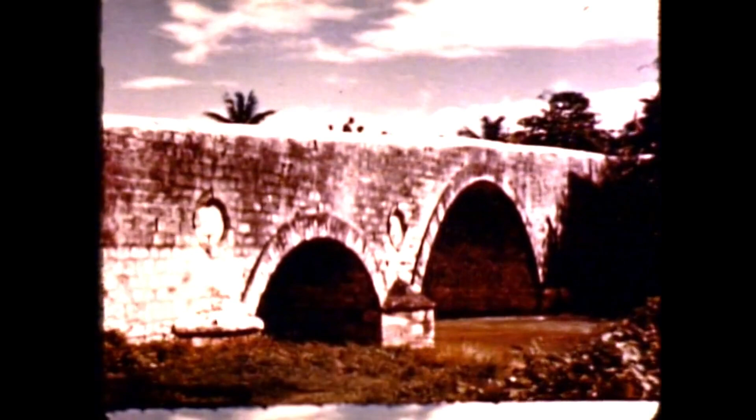Throughout human history, bridges have been milestones of progress, measurements of man's increasing ability to overcome the obstacles that once restricted his development. Today, a nation's progress depends to a large extent on an efficient and effective transportation network linked together by bridges designed to span every type of natural barrier.

Modern wheels, born to serve in a great transportation system, race over the once impassable barriers and speed on to the next triumph of the bridge builder's art. The development of our country owes much to the advance in the science of bridge building, which hastened the growth of our cities and of large sections of the country.

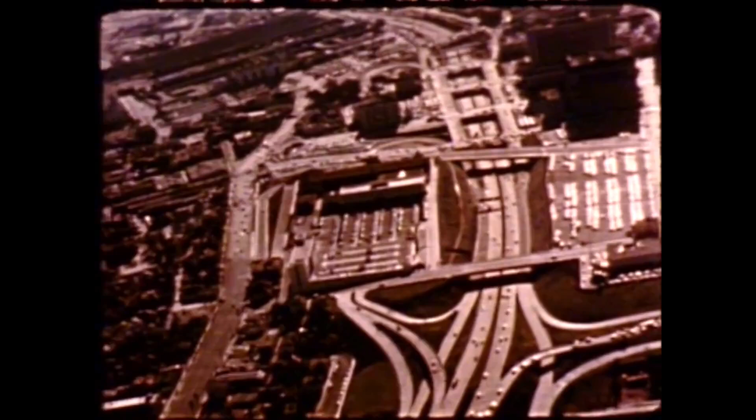Linking the country are tens of thousands of railroad bridges and hundreds of thousands of highway bridges, the world's finest transportation system, spanning gullies, ravines, and valleys, streams, rivers, and harbors, tying each solid land area to its neighbor, literally weaving America into a closely knit fabric with tough strands of steel.

Here, where the Monongahela and Allegheny rivers meet to flow westward as the Ohio, was the Pittsburgh of the future, the city which George Washington considered the gateway to the West. Pittsburgh is today the city of bridges and the home of the largest and best-known builders of bridges, the American Bridge Division of United States Steel.

In the shadow of the home of these bridge builders are many examples of their engineering skills. A showroom of bridges. All are vital links in Pittsburgh's transportation system and the country's transportation system. Structures based on a mastery of mathematics and physics and chemistry and geology and aerodynamics and other exact sciences.

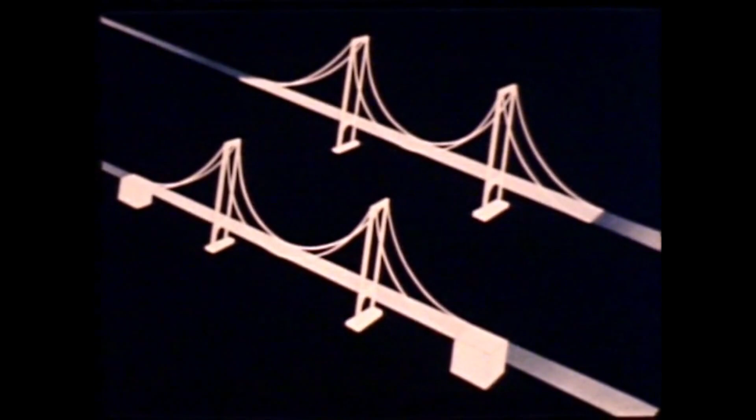The suspension bridge has been called the bridge of the future, since it is capable of meeting the demands for spanning greater and greater distances. Suspension bridges have personalities of their own, even though they may look alike to the casual observer. For example, these two bridges appear to be of the same construction. A closer look, however, shows that one is the conventional type with two tower piers and two anchorages, while the other is the self-anchored type with two tower piers, but with the roadway itself serving as the anchorage.

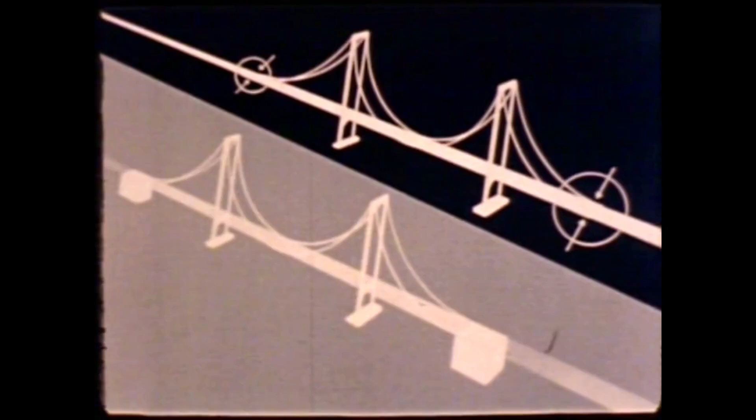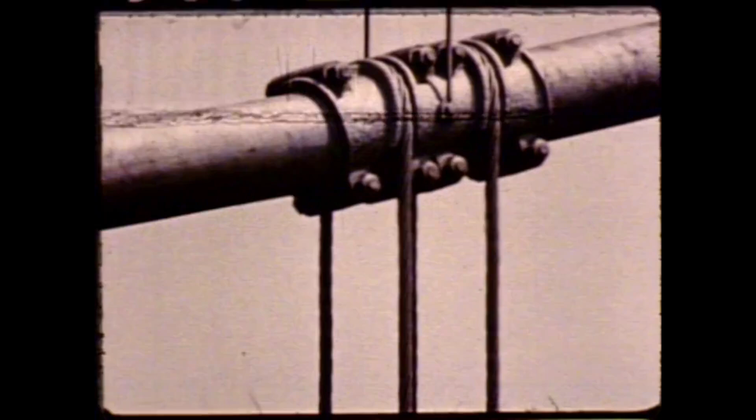Crossing the Monongahela River is a good example of the typical suspension bridge with its anchorage foundations and the foundations supporting the towers. The main cables, built up of thousands of parallel wires, run from anchorage to anchorage and are draped over the towers for support. And from cable bands, spaced at regular intervals, wire rope suspenders hold up the bridge below, hence the name suspension bridge.

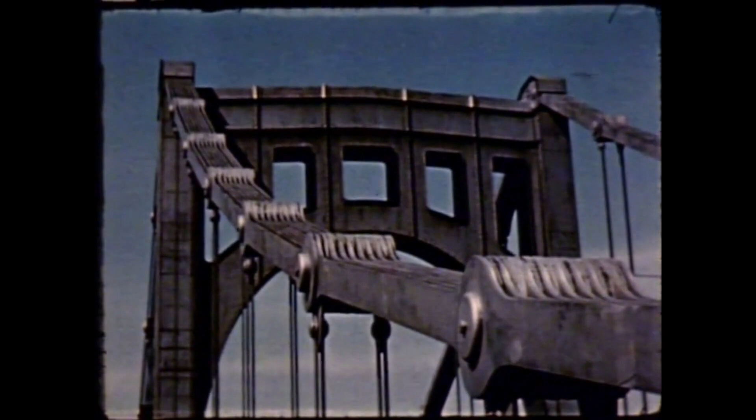Spanning the Allegheny River are three examples of the self-anchored type suspension bridge with two tower piers and no anchorage foundations. Their main supports are links of forged steel eye-bars, much like giant bicycle chains. The suspenders, too, are made up of eye-bars. As though lifting itself by the bootstraps, the main supporting chains are fastened directly to the longitudinal girders which carry the roadway.

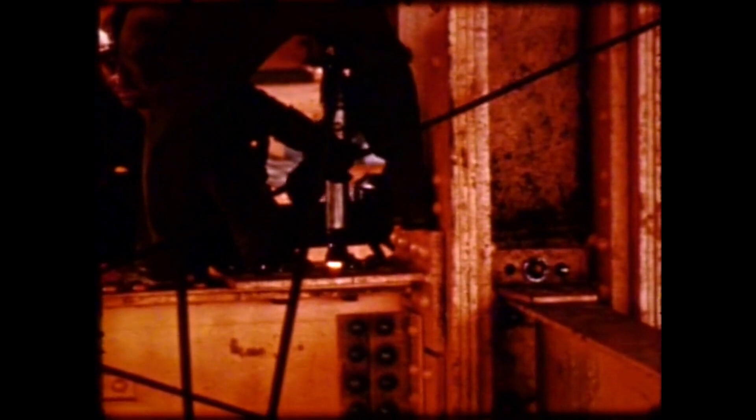The construction of a suspension bridge is exciting and dramatic, a challenge to bridge designers, to the fabricators of the integral parts, to the steel workers who convert lines from a blueprint into lasting monuments of steel. Methods of construction often vary because each bridge must be individually designed to meet existing conditions. Not only are there entirely different types of suspension bridges, but the methods of construction differ also.

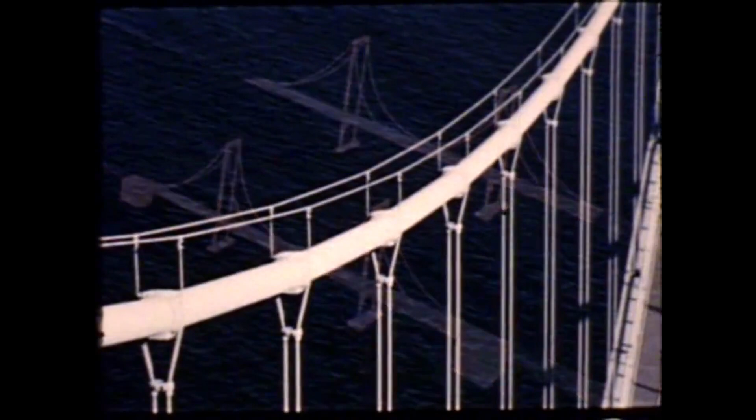For instance, cables are generally built up of thousands of single parallel wires banded together to form the main supporting cables. But in the case of the Paseo Bridge over the Missouri River at Kansas City, instead of building cables of single wires laid side by side, they are constructed of 37 pre-formed bridge strands. The strands have been pre-stressed and cut to exact length, with the ends permanently set into sockets, designed to fit perfectly into their anchorage seats.

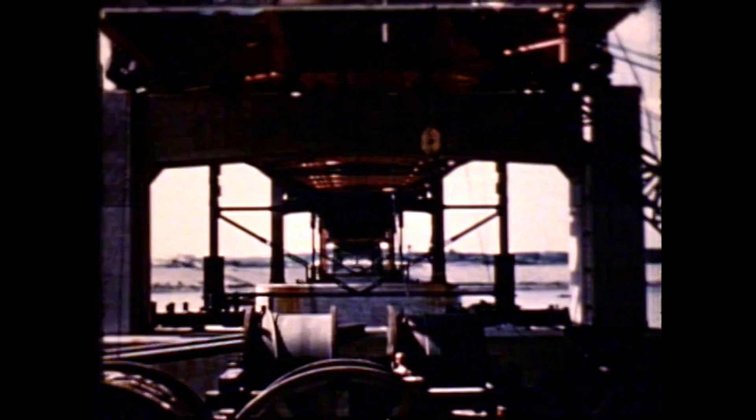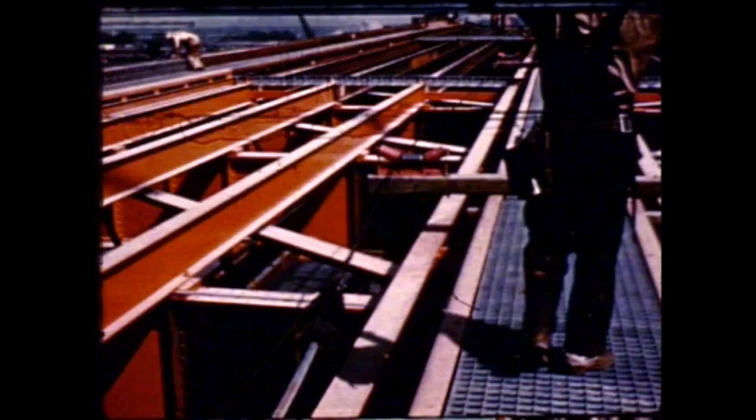Before the main cables were installed, the roadway itself was supported by temporary falsework. This gave the bridgeman a working surface for the construction of the cables. Rollers down the center of the bridge not only protect the galvanized strands, they also ease the work of pulling the husky steel strands from their reels located beneath the structure. Each of these reels holds a single strand with sockets attached at both ends.

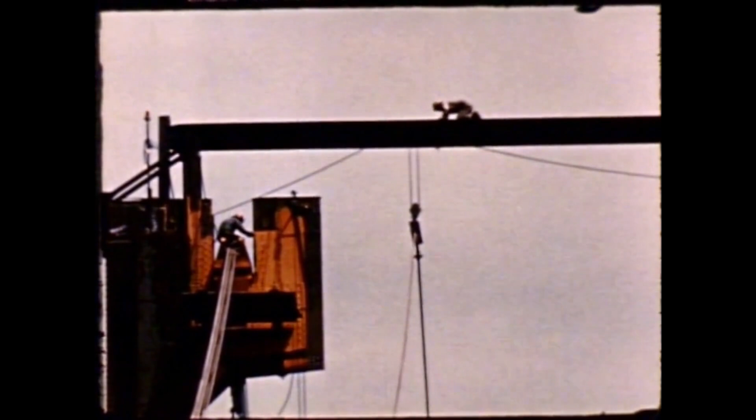Each cable strand must be hoisted to final position across the saddles on top of the towers. The sockets at the end of the strands are permanently seated in their anchorages. The pre-calculated length of each strand must be maintained if it is to exactly fit its anchorage. To keep any strands from twisting, which would lengthen or shorten them, the red lines must be kept parallel.

Aluminum filler strips fill the crevices between the strands in the cable. This makes for a smooth, rounded out surface so that the saddle will fit snugly around the cable. After sockets are locked in place, final adjustments are made to bring the strands to an exact predetermined tension. This is done at night when all the wires are at a more nearly uniform temperature. Information is telephoned from the center of the span to the crews at the anchorages.

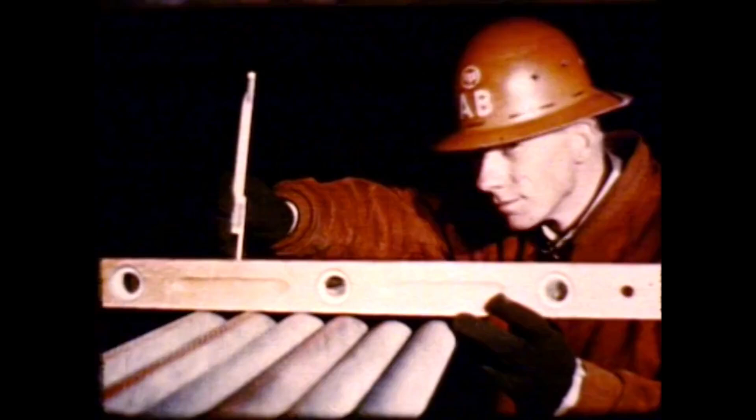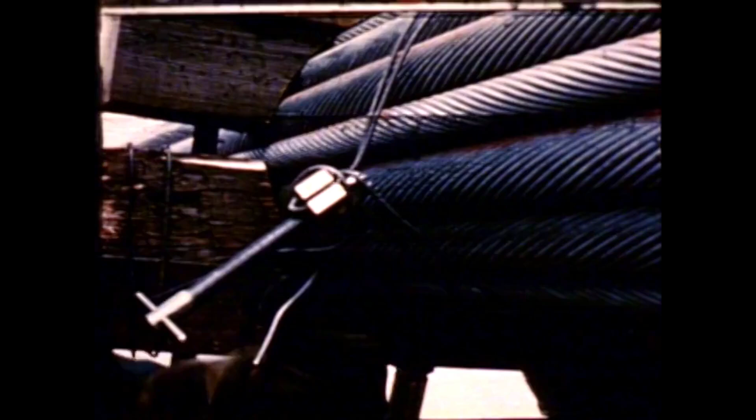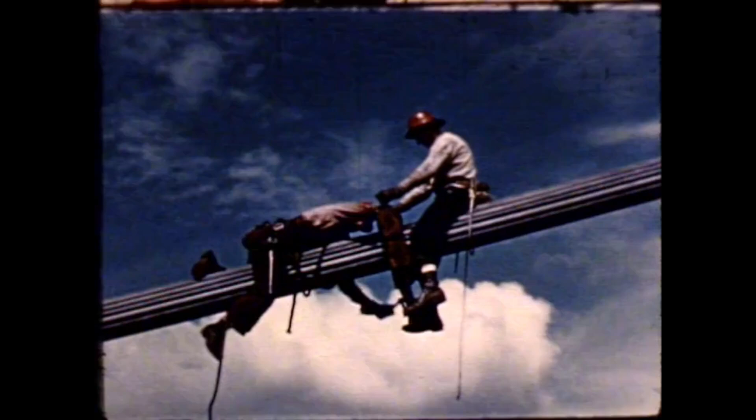The precision and care of bridge construction is well demonstrated by the accuracy with which the cable strands pass over the saddle. A simple hydraulic compacting device squeezes the cable into its final size and shape, and the cable is temporarily banded. Engineers locate the exact positions where the cable bands are to be attached. Safety lines are a necessary precaution. After all, bridgemen aren't birds.

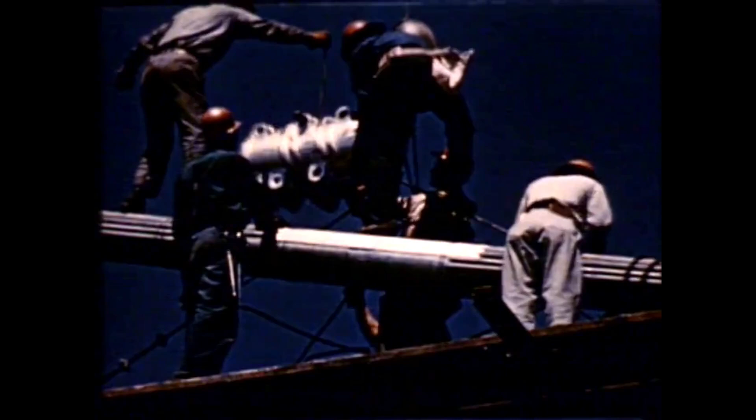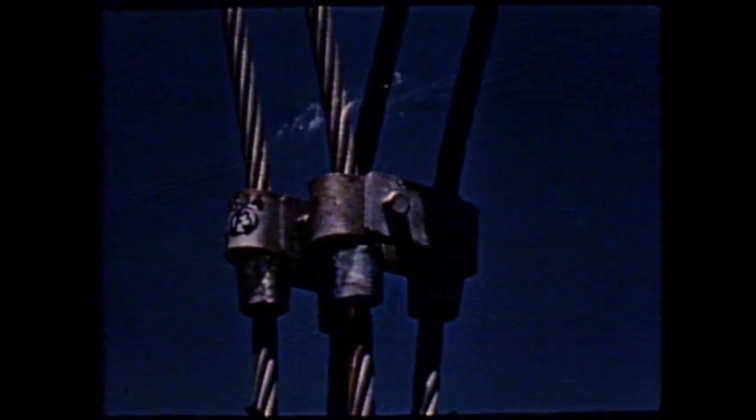Special aluminum castings give a smooth, firm base for the cable bands. A large moving scaffold hung from wooden rollers serves as a working platform. The wooden rollers protect the galvanized wires of the cable from damage. With the band secure, suspenders are hung into position along the cable's entire length. Bridge suspender ropes, like the cable strands, were accurately pre-stressed, cut and fitted with sockets at the factory.

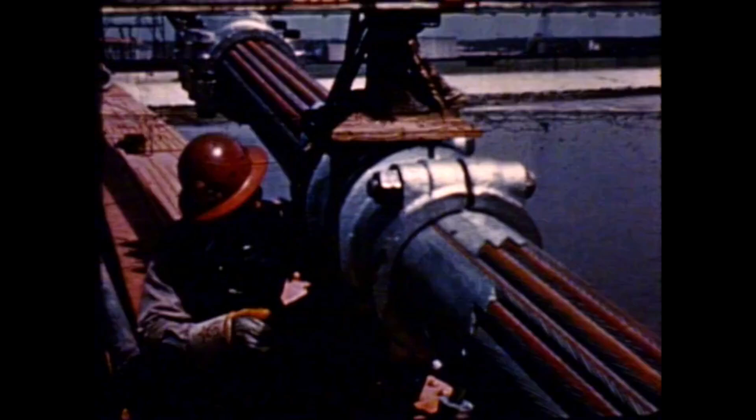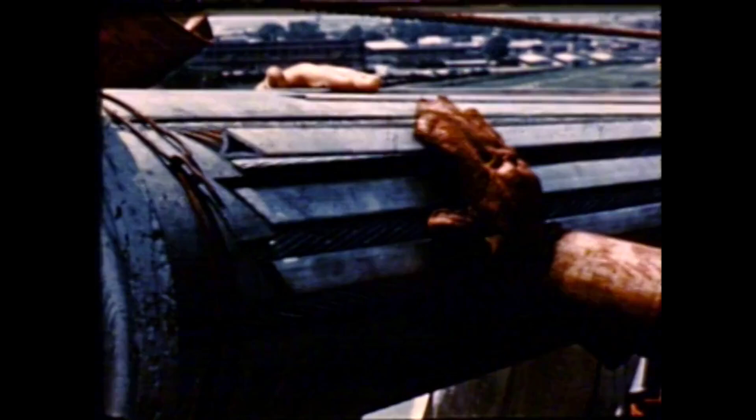As cable bands and suspenders are attached, the sockets on the ends of the suspenders are fitted neatly into their seats on the girders beneath the roadway and are secured by bolts through the stiffener angles. Long filler strips round out the cable for the wire wrapping operation. A wrapping machine spins 3 wires simultaneously, covering the cable throughout its entire length, except for the areas next to the cable bands. These areas are hand wrapped.

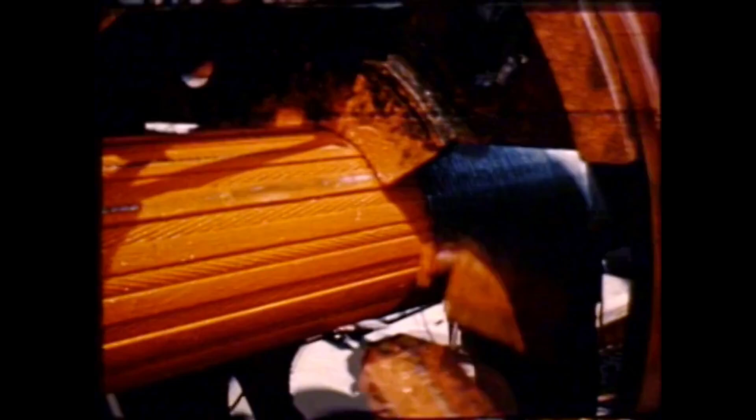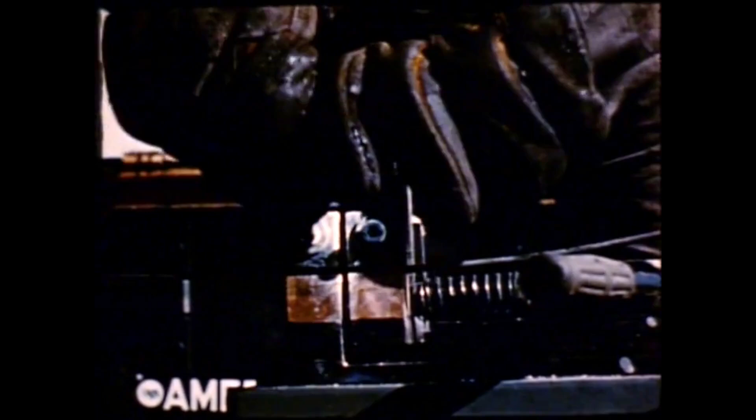A heavy application of red lead paste provides an excellent protective coating for the cable. The beginning of one spool of wrapping wire is neatly butt welded to the end of the previous spool. The splice is then heated and regalvanized for permanent protection. And the wrapping continues.

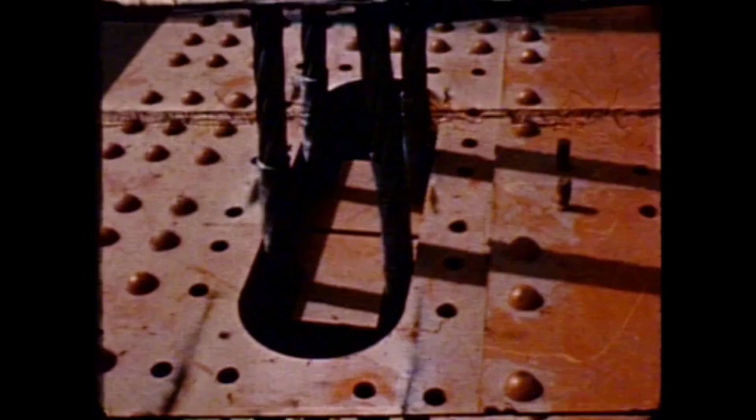After the last suspender socket is fastened to its seat on the girders, the temporary falsework supporting the roadway is removed. And there you are. A true suspension bridge with the road hung from above. A road suspended by steel wires and man's ingenuity.

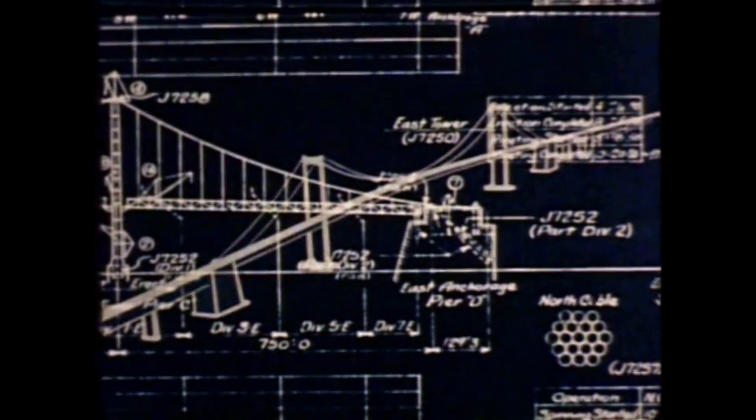There was an even greater challenge in erecting the Delaware Memorial Bridge, spanning the Delaware at Wilmington, linking the states of Delaware and New Jersey. To span this river, the engineers designed the conventional suspension bridge with 2 anchorages and 2 tower piers. Conventional? Yes, but unusual in many details. The construction of the tower piers and anchorage foundations was a king-size engineering feat.

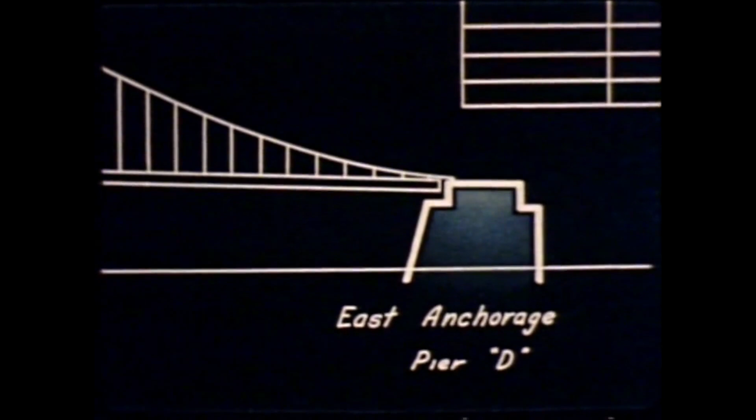For instance, the west anchorage, built by the open dredge caisson method, was the largest caisson in cross-section ever built and contained 60 dredge wells, each 15 feet in diameter. A cofferdam was used in the construction of the east anchorage. The massive piers, built of many tons of steel and concrete, make a solid base for these eye-bars to which the main cable strands will be anchored. They look like clusters of giant needles awaiting their threads of steel.

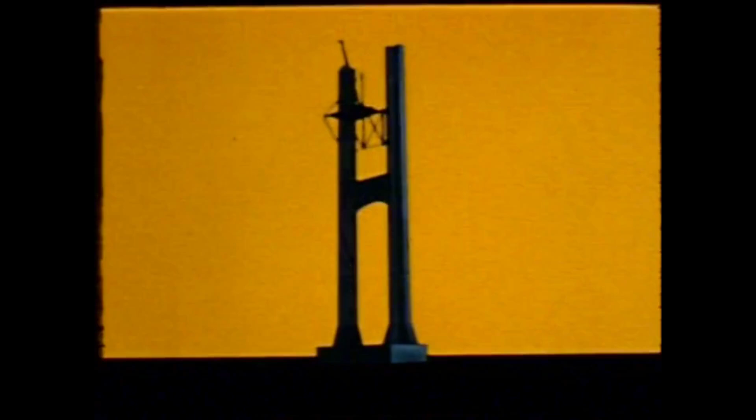As soon as the tower piers were completed, the steel tower construction was started. Floating derricks erected the lower sections and the vertical traveler. As the work progressed, the vertical traveler moved upward to set the heavy tower sections. These are the main vertical supports for the span. The towers rise to the height of a 45-story building above the bottom of the piers. That's about as high as the home office of American Bridge.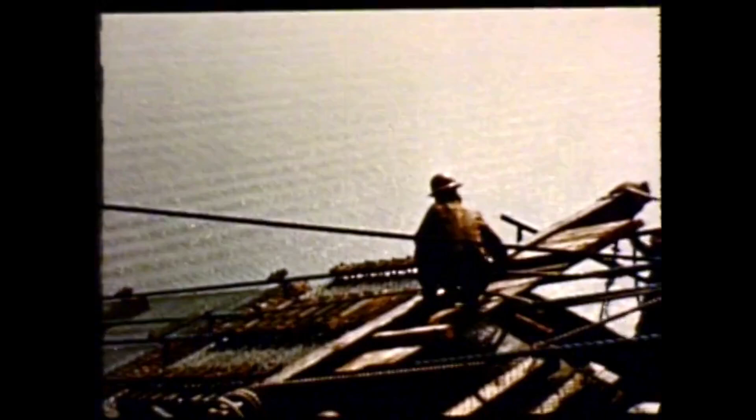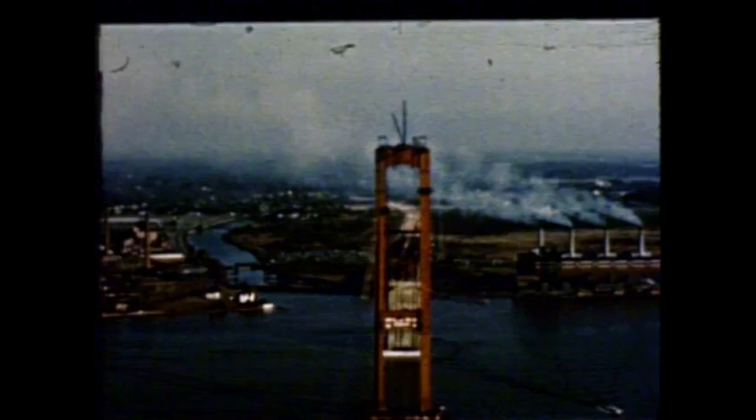These catwalks, invented by American Bridge engineers, are made of cyclone chain link fencing, supported by wooden cleats attached to the catwalk cables. This type catwalk has been used on many major suspension bridges in this country. It unfolds readily, like accordion pleating, and actually becomes a temporary suspension bridge, a sort of harbinger of the real thing to follow. The cables holding up the catwalks serve another purpose. Eventually, they go back to the factory, are cut to length and socketed to form the suspenders for the main bridge.

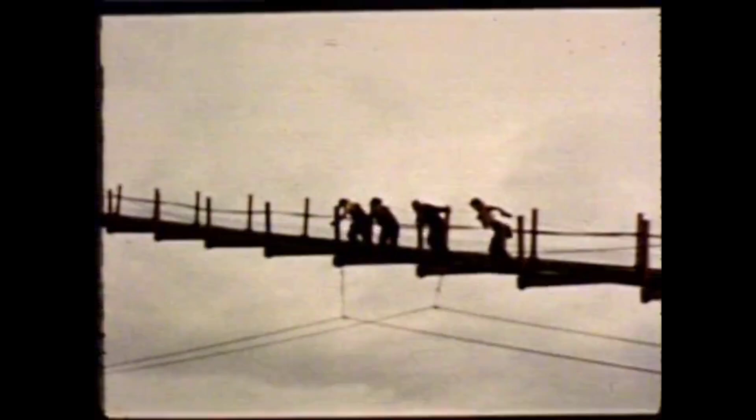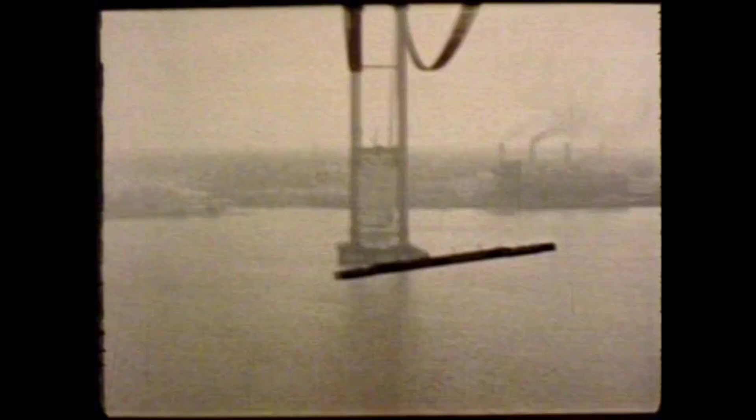Cable hand railings stretched along wooden posts on both sides of the catwalks give the men additional protection. These men are constantly working in the shadow of the slogan, "Safety First," coined many years ago by United States Steel. On a job like this, you have to reckon with wind. So a web of temporary cables is put up to resist the movement of the catwalks. Then, to steady them further, temporary struts tie the 2 catwalks together. The struts, placed at the center and quarter points, make them more rigid.

The workmen erect the tramway supports for the installation of the endless hauling ropes, to which the spinning wheels will be mounted, for the purpose of pulling loops of wire from large supply reels back and forth to form the cables.

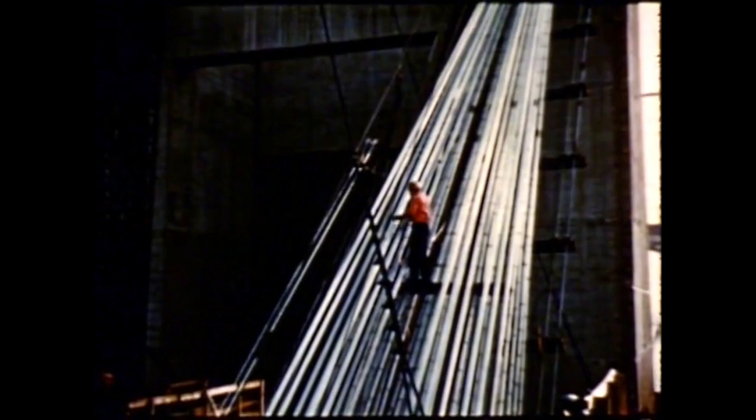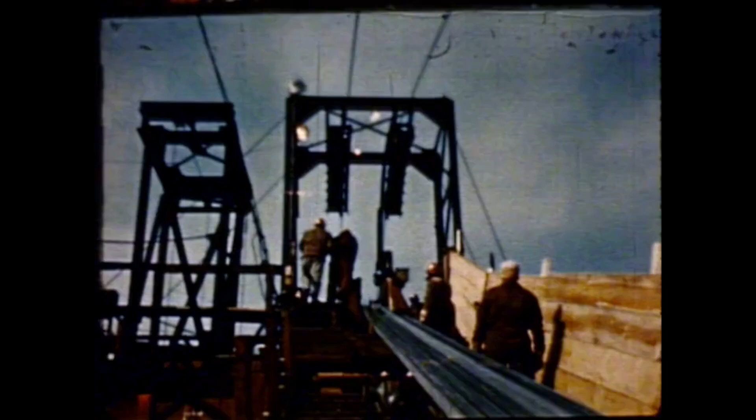To speed up cable spinning, double-grooved wheels are pulled across the river by the endless cables of the tramway system. Each wheel lays 4 wires on every trip. Since there is another wheel coming from the other anchorage at the same time, 8 wires are laid each time the spinning wheels cross the river, the wheels passing each other in the exact center of the bridge on each crossing.

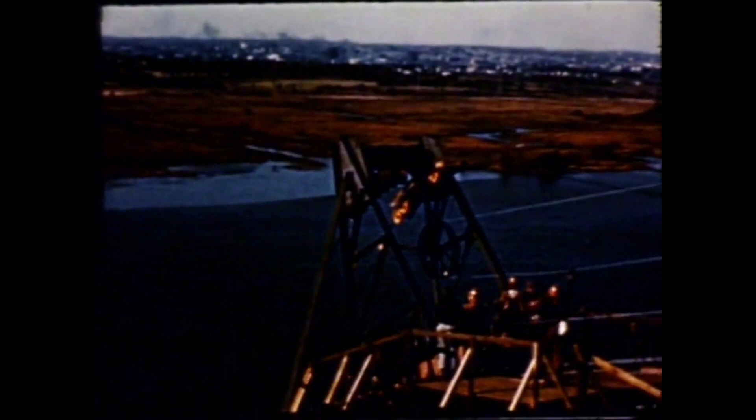The spinning wheels dip sharply over the cable bent and go down to the anchorage. Here, the wires are looped over the fittings attached to the eye-bars. Then the wheel is reloaded with 2 new loops from the large wire reels and is made ready for the return trip across the river. And of course, the same transfer is made at the anchorage on the other side of the Delaware at the same time.

The workmen receive the two lower wires of the loop, called dead wires, from the spinning wheel and place them into the strand. As each strand is completed, temporary bands hold the wires in place. The spinning wheels travel at a pretty good clip. To warn the busy men on the catwalks of their approach, a cowbell attached to the wheel rings a constant alarm.

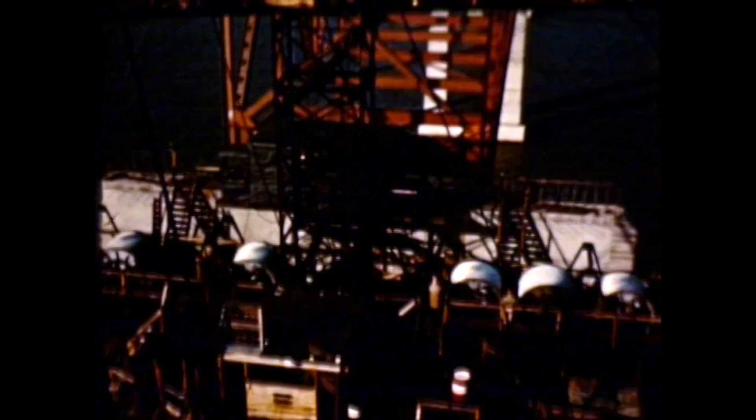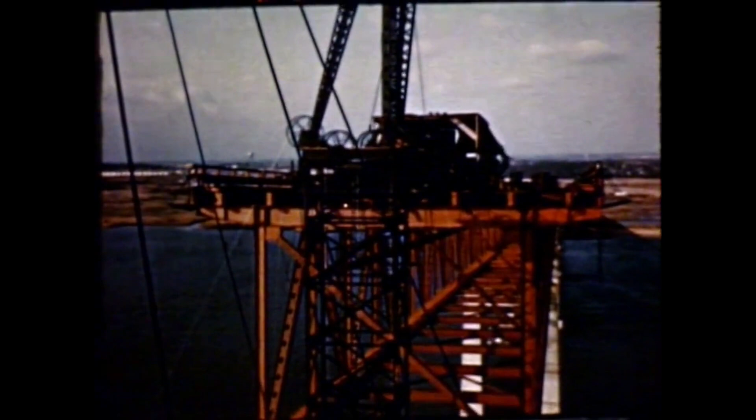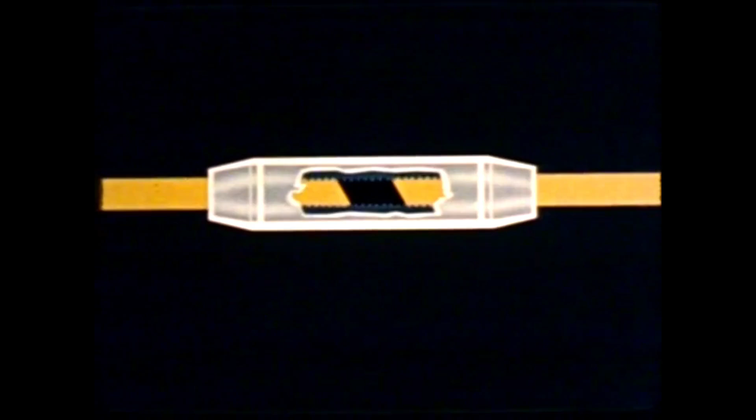Uniform tension is maintained during the spinning operation by a series of counterweights and sheaves housed in the spinning tower. There is not much time lost between reels. Another is always waiting to be rolled into position. The ends of the wires are spliced together and the spinning continued. In splicing the wires, an ingenious device is used. A steel sleeve with right and left hand threads draws the threaded ends together. As the ends are beveled, they will interlock and thus prevent accidental unscrewing.

According to the prearranged schedule, the 16-ton reels are trucked from the wire plant, loaded onto barges by locomotive crane, then towed to the bridge anchorage, assuring a constant supply of wire throughout the spinning operations. The cable reels are hoisted to a working platform on top of the anchorage.

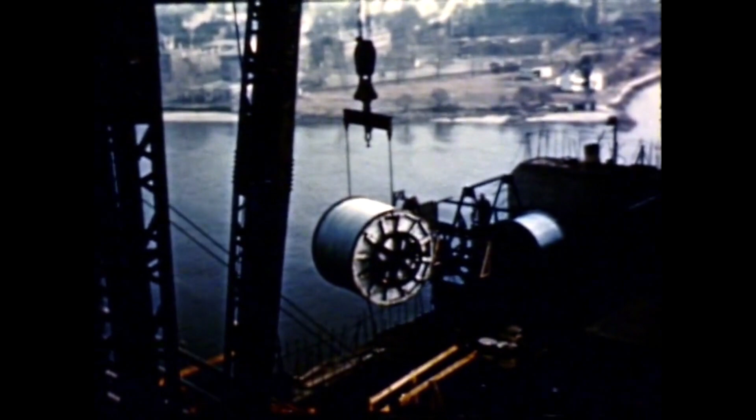Work continues even during the cold winter months. The spinning doesn't stop, even for darkness. The day crew leaves, another picks up the work under the floodlights. Spinning, constantly spinning, night and day, around the clock. While struts and temporary cables help steady the catwalks, sometimes the main cables have to tussle with the bridge builder's greatest annoyance, the wind.

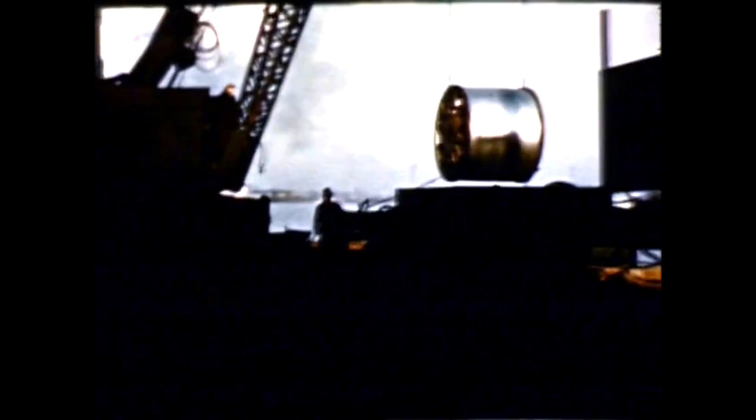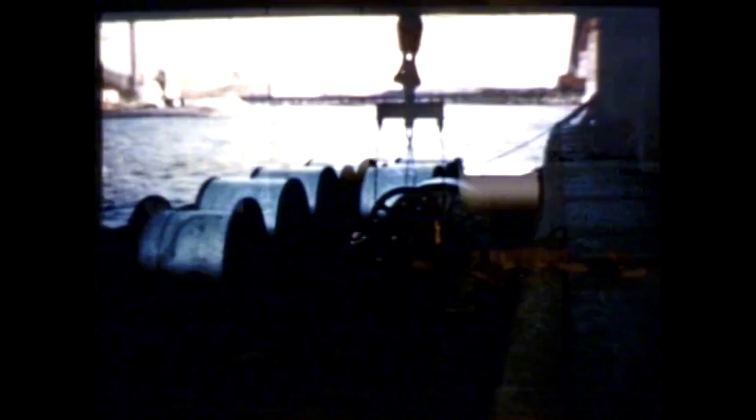Just as important as logistics in wartime is the storing and delivering of materials for bridge construction. The municipal dock at Wilmington, with its many acres of storage area, served as the depot for the receipt and transfer of the many tons of material needed for this bridge. And loaded with this material is the inevitable barge, always waiting down below, with just what is needed above.

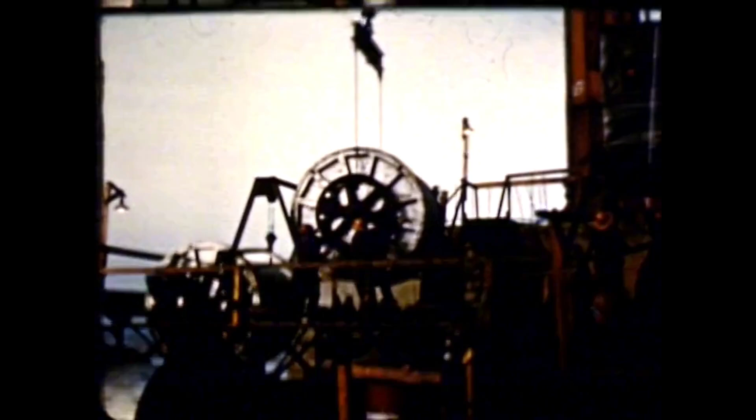This is not exactly what we'd call an architectural gem, but this snug shell protects the hoisting engineer from the icy blasts while he keeps the reels of wire moving so that the spinning can go right on, night and day, up from the anchorage, over the cable bent, and off across the Delaware. The wheels shuttling back and forth, laying down wires. 436 of them building up into a single strand. 19 strands paired off with 19 eye-bars, and the 19 strands converging into a single giant cable of 8,284 wires, waiting to be banded together permanently.

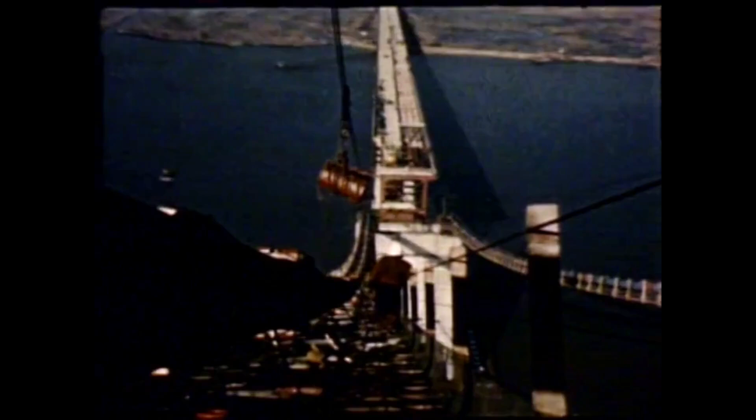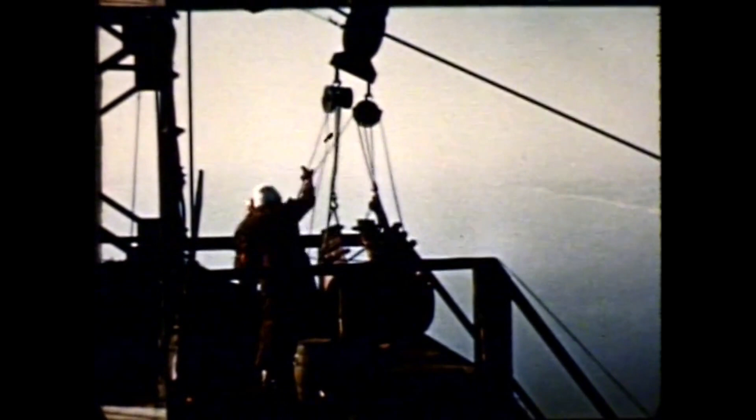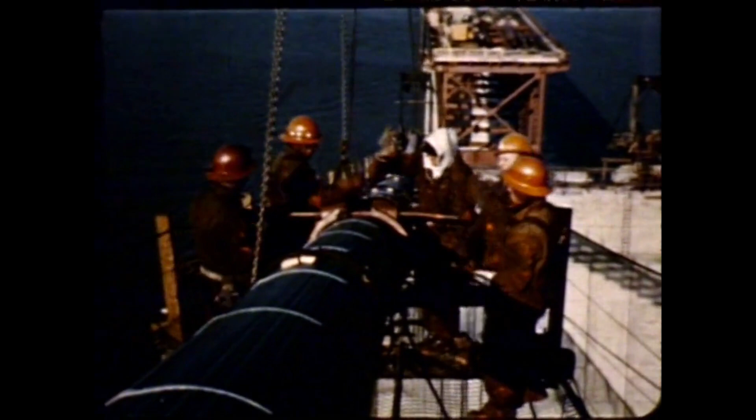Before banding, the main cables must be compacted to their final size. During this process, the catwalks were hung from the main cables, while the 2-inch wire ropes which had previously supported the catwalks were returned to the wire plant for conversion into suspender ropes. The cables are now ready to receive their cable bands. Workmen using chain hoists lift the bands to trolleys which roll them to their positions. Each cable band from which suspenders are to be hung was designed for its particular location on the main cable. The cable bands are securely attached over a coating of red lead paste and then tightened with sturdy bolts.

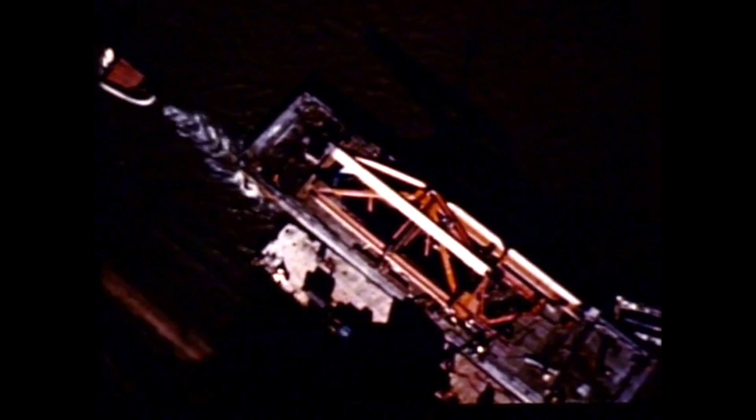The 2-inch suspenders, which were cut from the original catwalk cable, are attached to the cable bands, the ends left dangling until their trusses are ready down below. The suspenders do not have long to wait. While they were being installed, steel chords, diagonals, and verticals were assembled at the depot and riveted into large truss sections 20 feet deep, loaded aboard barges, and floated to the bridge site. The erection of the roadway trusses starts at the towers and works outward in both directions at the same time. Traveler derricks hoist the truss sections into positions.

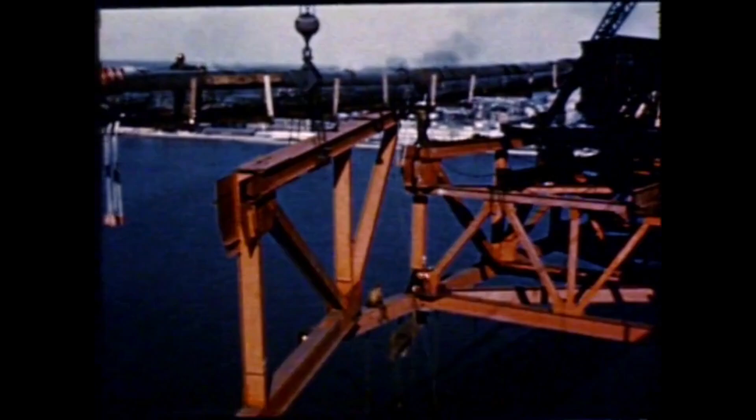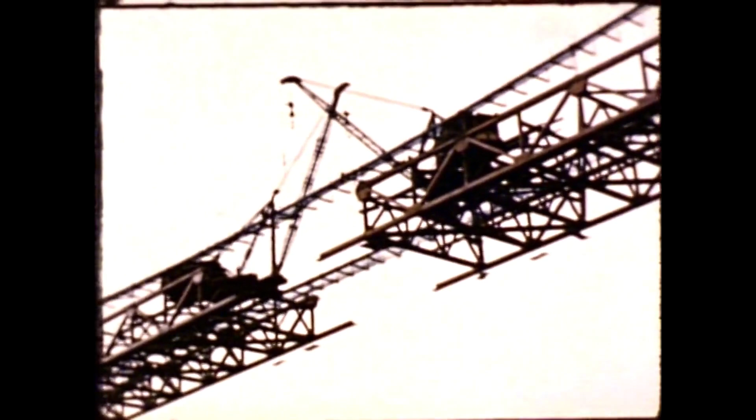The longitudinal roadway trusses are tied together with heavy transverse trusses known as floor beams. These floor beams, together with the lateral bracing system, add stiffness to the entire structure. The traveler derricks work their way to the center and are ready to close a span of 2,150 feet with the last truss sections. And the suspenders hanging from the cable bands on the main cables are ready for the last trusses.

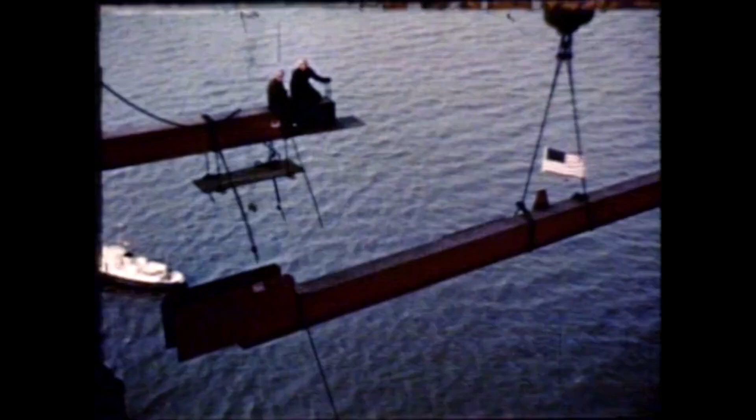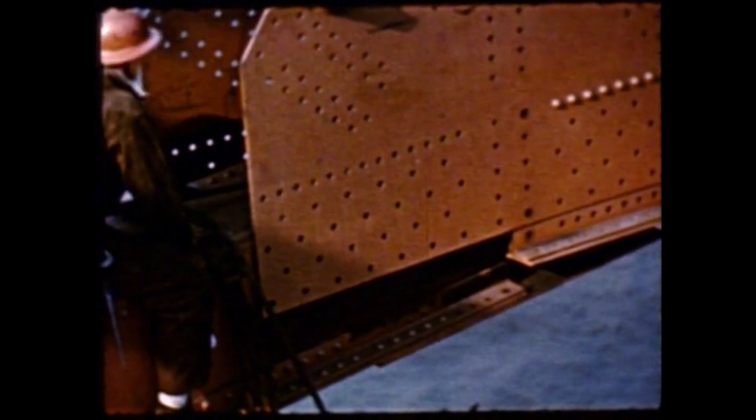And here is one of the last chord sections decorated with briskly flying stars and stripes, the bridgeman's symbol for closing the span. The men know that it will fit because every steel member has been made exactly to the engineer's blueprints. On bridge work, all members are temporarily connected with drift pins and bolts, which are later replaced with rivets.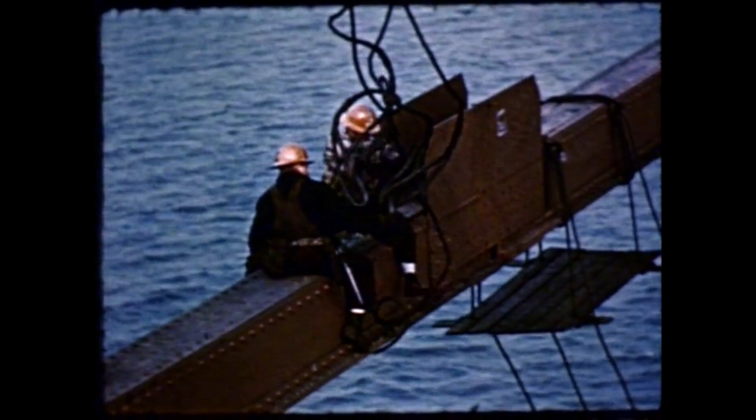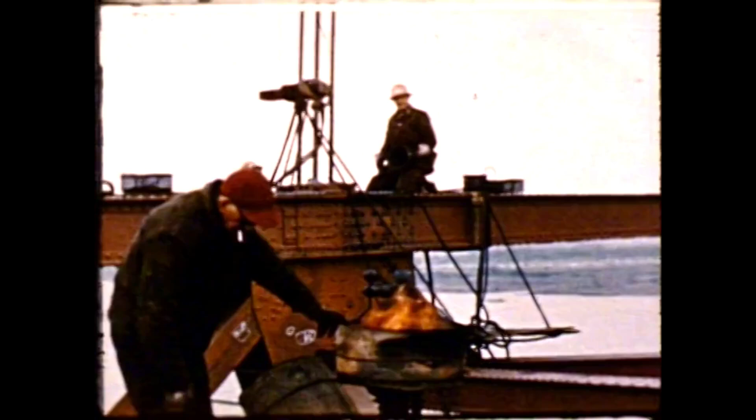The two traveler derricks have finally worked their way face to face. They seem to be bowing ceremoniously as though congratulating each other on a job well done. White-hot rivets permanently connect the sections as drift pins and bolts are removed.

One of the last chord sections slides into place. The slings are removed. This is hardly the place for anyone who is jittery. It takes courage plus to be a bridgeman, but these fellows are no more concerned about their perch high up over the cold Delaware below than if they were playing a game of gin rummy in the tool shanty. It's their job.

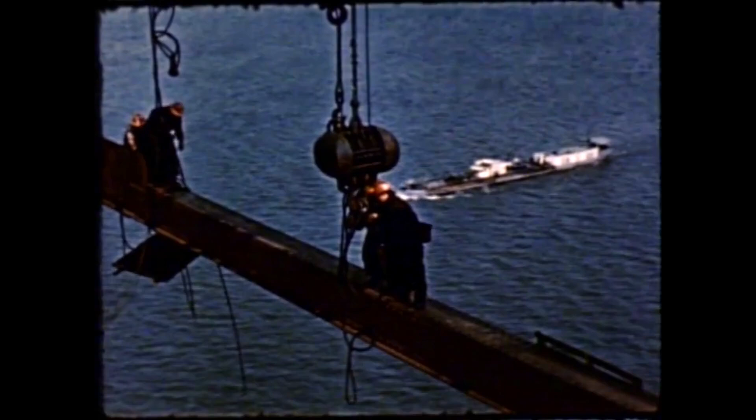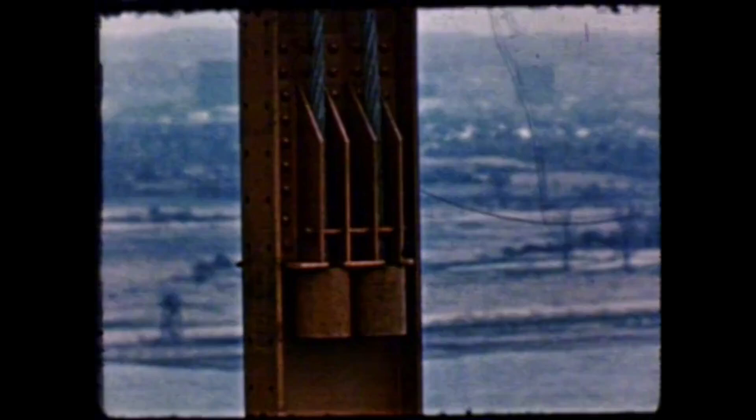One of the last verticals is set into position, and at the upper end, the suspender is seated. Another vertical going into position. All in a day's work, a bridgeman's work, that is. Straight up so that he can place the suspender in its seat. Just a single bolt through the stiffener is all that's necessary to hold the suspender in place permanently.

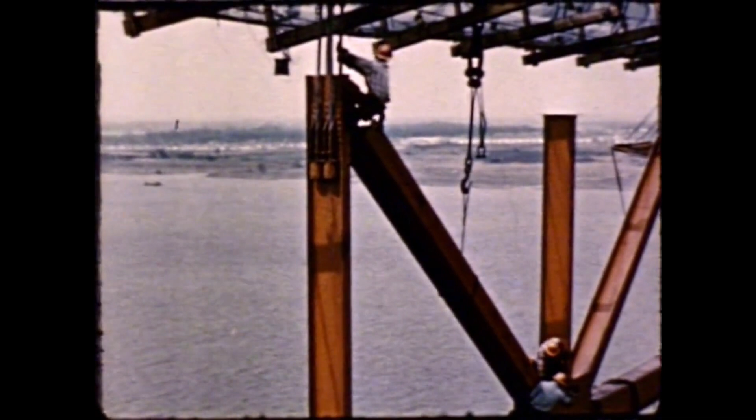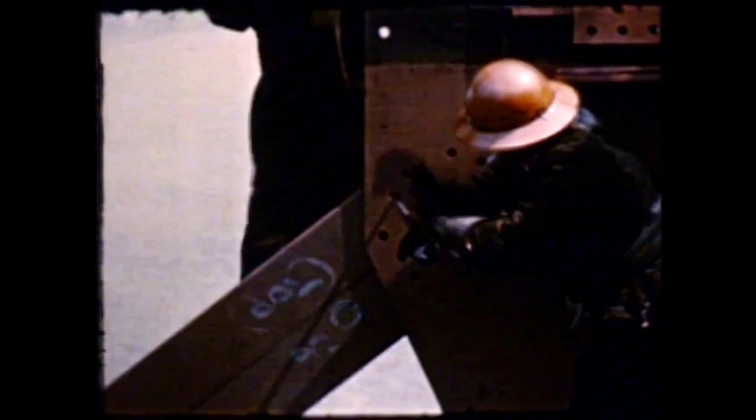These men are too busy to gaze at the ships below. Besides, there's always another one on the way. After the verticals are in place, the diagonals are set. A little fancy footwork helps, and the spud wrench finds the matching hole. Here's an easy way down. Fun, isn't it? Well, anyway, he's at home up here.

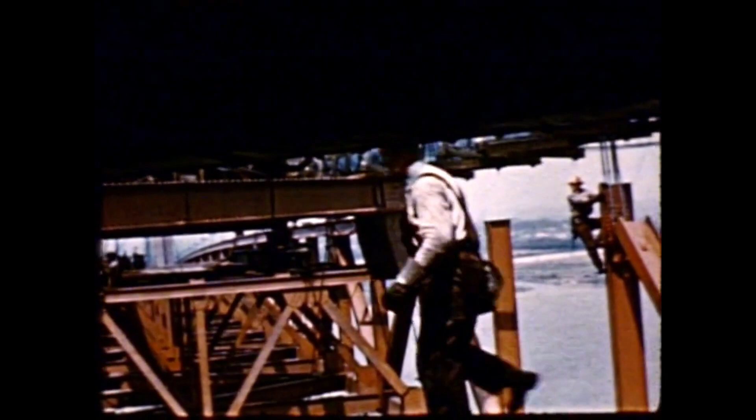Double wire rope slings not only provide additional safety, but also the member is in the exact position desired by the workman above. With the verticals and diagonals all set, the structure is ready to receive the top chords. The gusset plates receive the ends of the diagonals and verticals, then the last section is set into place. Another straight up climb, and the vertical is connected to the top chord. Finally, the splice plates, already temporarily bolted to the member, are placed.

Not a finished bridge yet, but it's easy for a bridgeman to picture the heavy traffic which will soon be speeding across the structure. After the roadway system has been filled in at the center of the span, the unfinished sections between the anchorages and the ends of the roadway trusses are completed.

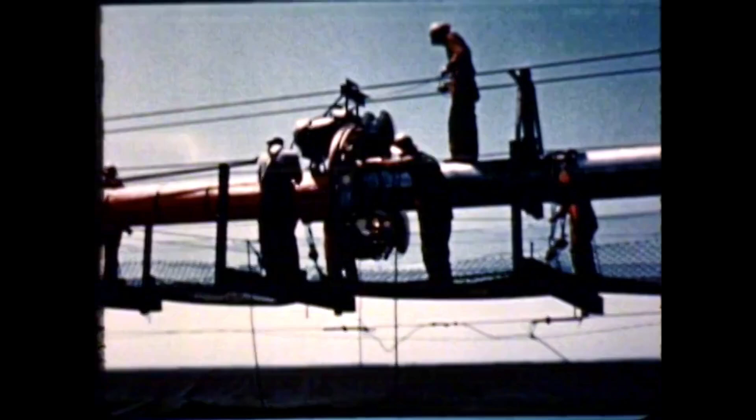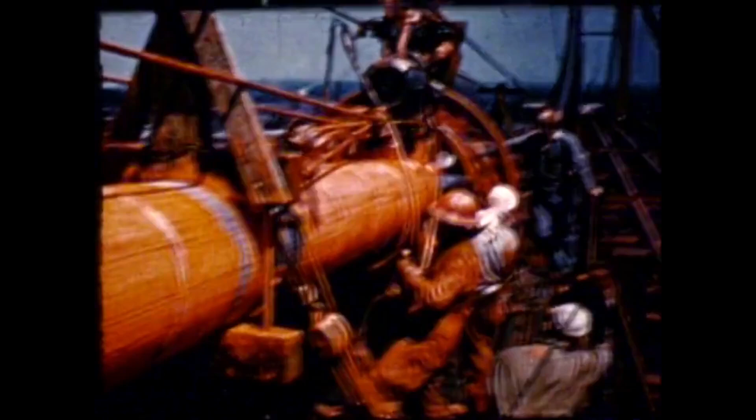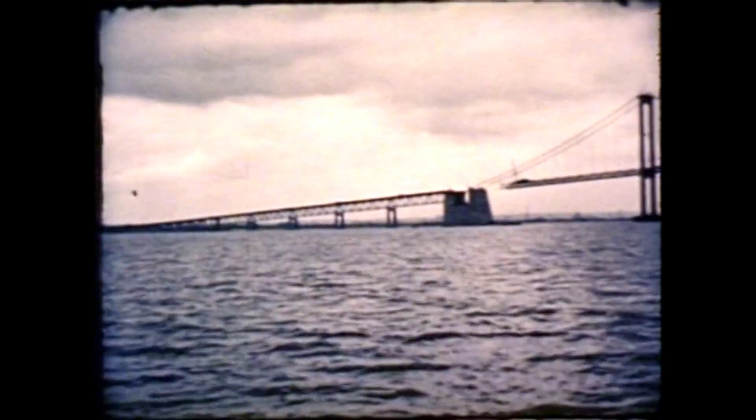A wrapping machine, similar to the one used on the Paseo Bridge, covers the main cable with a tight-fitting steel wire overcoat. Permanent protection against the weather is provided by the heavy red lead paste which coats the entire cable. From the amount of red lead on the workmen's clothes, they would seem to be preparing for a rough winter. From a distance, it's difficult to judge the massive sizes of the individual members of a suspension bridge.

Add to the main suspension bridge the deck girders, the deck truss approaches and overpasses at its terminals, and you get a good idea of the teamwork among all the men and the many firms, large and small, who played a part in making the bridge a reality. What a job. There were over 175 subcontractors, each tops in his particular field, and all working from the same master set of blueprints and specifications.

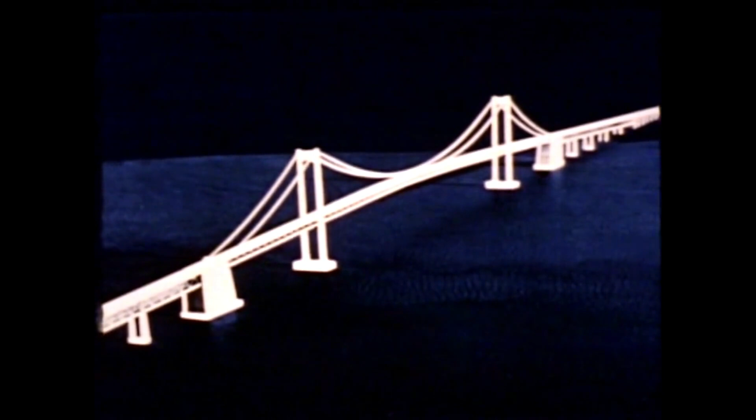They so dovetailed and synchronized their individual chores that a 3,650-foot suspension bridge from anchorage to anchorage and almost another 7,000 feet of approaches was ready for public use within 18 months after the first steelwork for the superstructure was started.

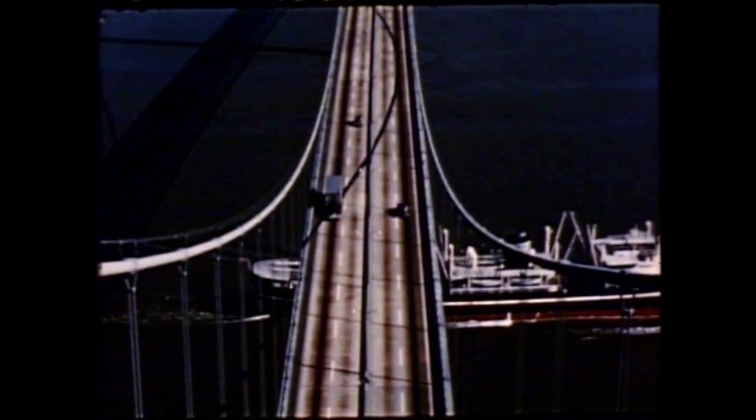Today, spanning the often turbulent waters of the mighty Delaware, with ships from every port plying back and forth in endless procession, this beautiful bridge is truly a fitting memorial to the World War II heroic dead of Delaware and New Jersey. And another suspension bridge closes a gap in America's great transportation system.